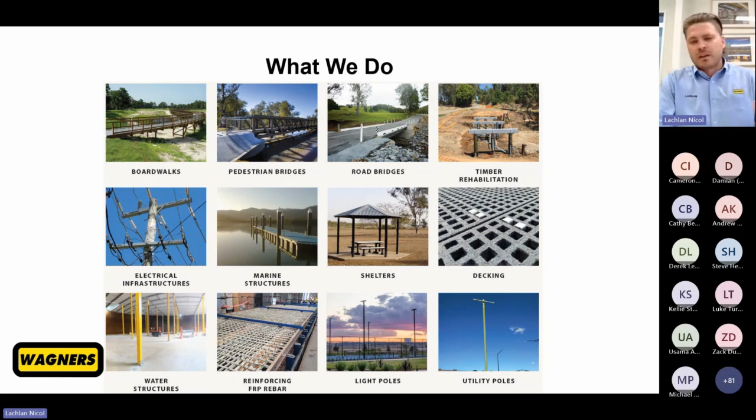What we do, which I'll only briefly touch on here, I'll talk about it later on. We essentially create structural pultrusion profiles out of fibre composite, and we supply them to a range of different product lines or projects, or essentially anywhere that structural members are required. That's where we usually service. So civil infrastructure, electrical infrastructure, industrial, those sort of things.

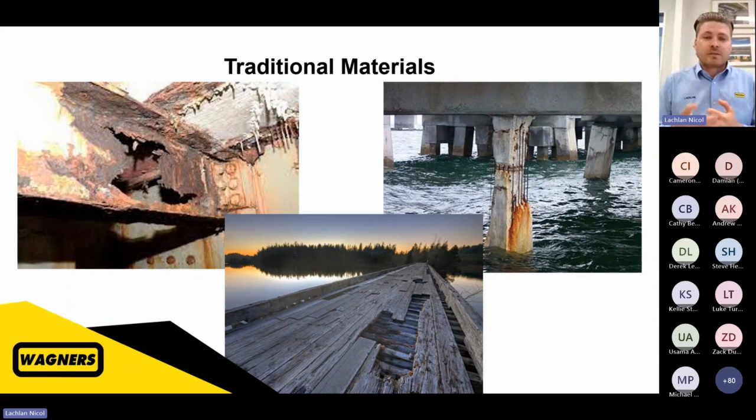The traditional materials, and these are obviously quite extreme examples, typically can suffer in corrosion-prone areas or very harsh environments, which is where fibre composite, at least in the civil marine infrastructure industry, has really taken off, to be able to combat those corrosion-prone areas. So very high salt environments, acid sulfate soils, what have you.

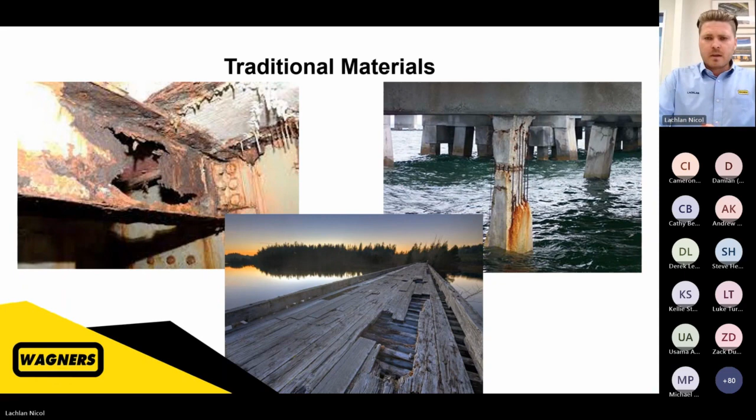The key benefits of FRP, fibre reinforced polymer, versus traditional materials such as steel, timber, concrete. I think a lot of people will understand the benefits, but the real key driver for us in this civil and marine infrastructure application is corrosion resistance, as I mentioned before. Doesn't rust, doesn't rot, doesn't corrode in all sorts of environments: acid sulfate soils, high salt environments, harsh alkali environments.

It's very lightweight, so about a quarter of the weight of steel for a traditional structure, say a 20-metre bridge. It's hard to compare on a metre per metre rate, a standard length weight ratio, because the design is slightly different in how you build up your structure. So if you consider it as a typical structure, about a quarter of the weight of steel structures.

The high strength to weight ratio: obviously lightweight, but we're actually quite a lot stronger than steel in the tensile direction. We're about 610 MPa. For those engineers out there who understand steel strengths, about 250 to 350 for your typical yield strengths of steel. So significantly stronger.

One of the challenges to work with in composites design is the lower modulus. We're about 40 GPa, so quite a lot lower than steel. So it's part of that different design: we would typically design around our service limits, so deflection limits for a bridge or a boardwalk, compared to the ultimate strength you would normally design for with steel.

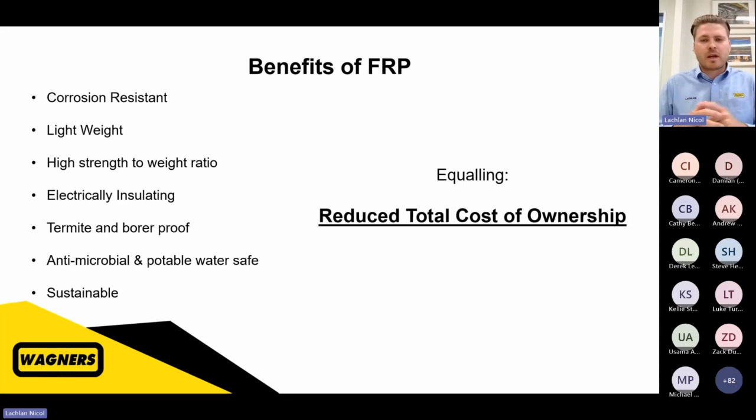You can get very specialised resins that have very unique properties, but come at a bit of a premium in cost. Whereas for civil infrastructure, where our key market is, vinyl ester is a really good corrosion-resistant, very hardy, very long-term resin. And essentially that holds all those rovings together. It doesn't provide a whole lot of strength necessarily. It just holds all the glass rovings in a nice, neat package, and that creates our structural material.

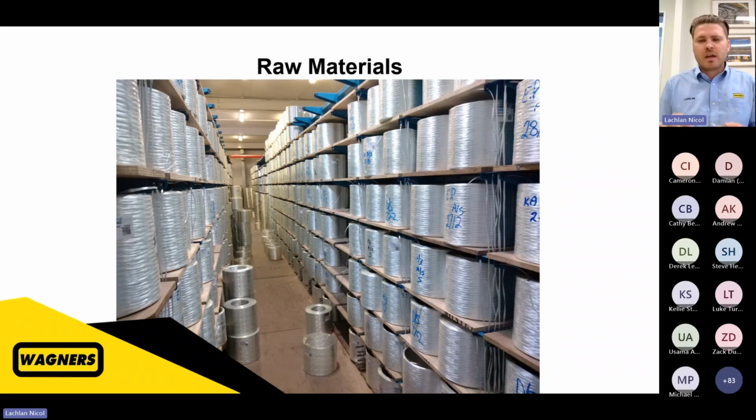So the pultrusion process, for those of you who don't know, a very basic overview. Glass rovings, like you saw in the racks there previously, are the key start to the whole process. Those get pulled through the rest of the line through a series of dies and guides. We apply a surface veil, so that encompasses the whole package. That's a polyester wrap over top of it, and that gives us a nice smooth surface. It creates a resin-rich layer, which helps with things like UV resistance and with that cosmetic finish.

Where all the magic happens is the injection and the heater dies. So this is where the resin is injected and flows through the full dry glass package. And then the heater dies cure the resin. So essentially it kicks off a chemical reaction based on the heat, and it cures it. So it goes from a liquid resin into a hard shape.

And then the reason for the name pultrusion, it's a pulling process. So unlike something like aluminium extrusion, where you would push a billet of material from the back, we pull all of our materials from the front through. So the pulling mechanisms are a hand-over-hand action. One's pulling all the material through, while the other one's returning back to home and waiting for its turn to take over, and then it takes over and just keeps feeding the whole line.

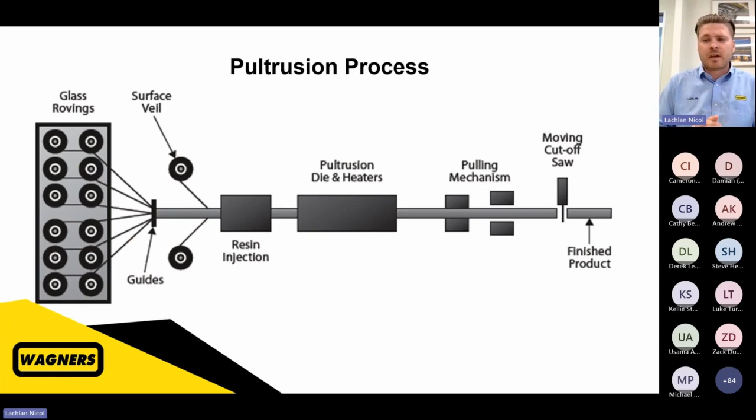Because it's an automated process, we have the ability to run 24 hours a day, 7 days a week without stopping at all. The material is all continuous, so continually injecting resin, continually tying in glass roving, so the process doesn't stop essentially. So we have an inline saw that cuts off all that material to the specific length that we require. This is a pultrusion machine, so very basic overview.

Some of our key points of difference is our glass to resin ratio. So we have a unique method of applying the glass around a centre mandrel called pull winding, as well as our injection die. So typically, normal pultrusion processes would require a bath and glass mats, and that also means a lot higher resin ratio, which, as I mentioned before, doesn't provide you any real strength. It just holds all the glass rovings, which do provide the strength in the material.

So our glass to resin ratio is about 77%, whereas typical pultrusion processes are about 50 to 55%. So as a result, we get significantly higher modulus, which is the key thing, like I said, the key driver in our design. So about 40 GPa elastic modulus in the tensile direction compared to about 15 to 20 GPa in traditional style pultrusion processes.

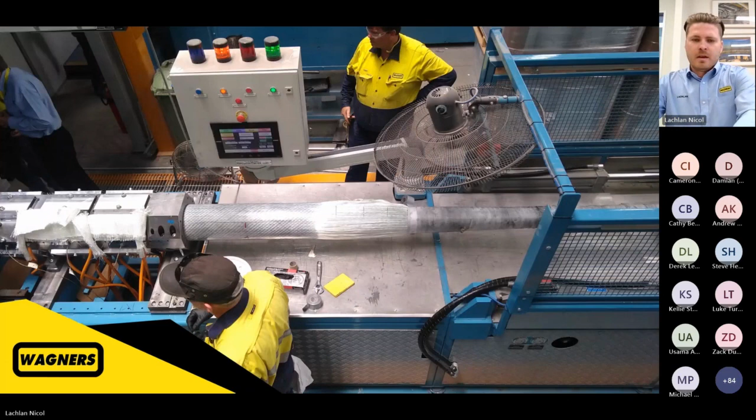This is a bit of a bird's eye shot just to show you the transition. So this is a new startup process. When we change a die, we need to pull through all of the glass. So you can see that little transition from glass package dry, and then once we started injecting the resin, that then starts curing it, and that creates this nice hard shape, which then goes through the pullers, and that's just a continuous process, 24 hours a day, 7 days a week, pultruding hard. Sorry.

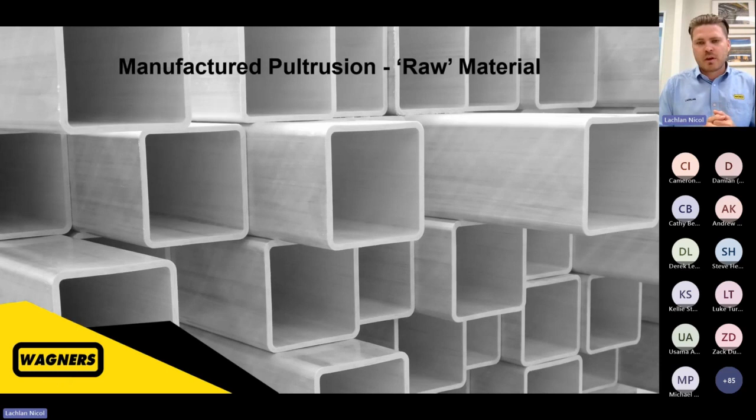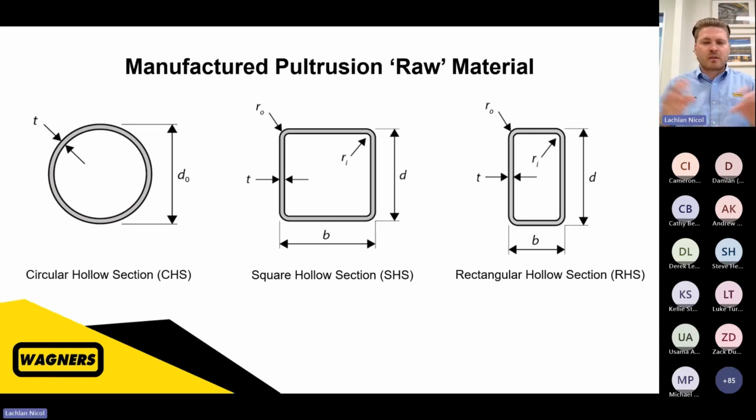Based on our unique method, one of our key differences is that pull winding process. We traditionally only make hollow profiles, part of that raw processing. So circular profiles, rectangular, square profiles. But our trick is we post-process and turn it into C-channels, I-beams, angles, what have you, to then do that full range of structural profile.

Part of the key point of difference as well for us is being ISO 9001 accredited. So we have a very stringent quality control program that includes raw materials, goods inwards, essentially, our glass, resin, inserts, adhesives, what have you, mechanical properties of our actual raw material, our raw pultrusion, physical properties, weight, dimensional checks, what have you, and then also our post-process, so our inserted material, our bonded material, our coating thickness. So checking every single process down the line to ensure what the asset owner gets at the end of the day is as designed, as expected, and will last that full 100-year design life.

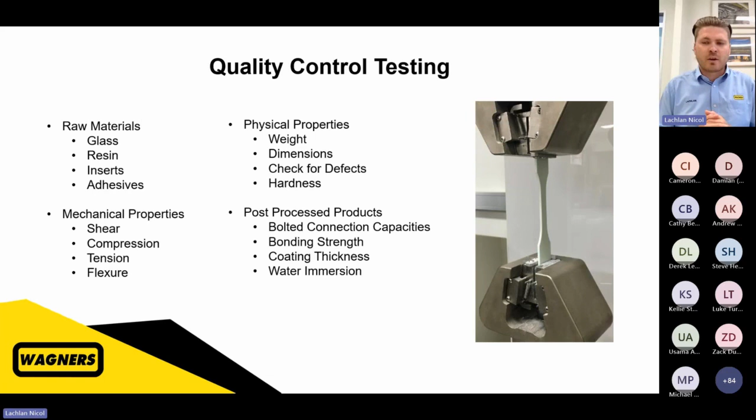Part of our other unique service offering is in-house design and testing. So we have a significant design group. So we do a lot of design in-house to support asset owners or contractors who might not typically be used to designing in composites. We do encourage clients to be able to design themselves, to sort of take out one of those key processes and give the authority back to themselves to design how they would like to design. However, we do have that service to give them assistance along the way, or design and certify in-house as needed.

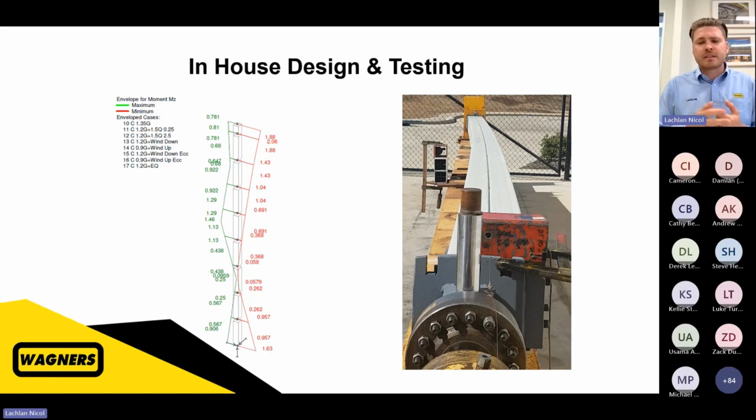So we're very proud to have these overheads that typically wouldn't be used in a direct project application. So the quality control process and our R&D, we're very proud to have these overheads on board because it helps us as a business to stay a competitive manufacturer in Australia. It ensures quality and ensures growth and development for a young and growing industry, which is the composites in the structural application.

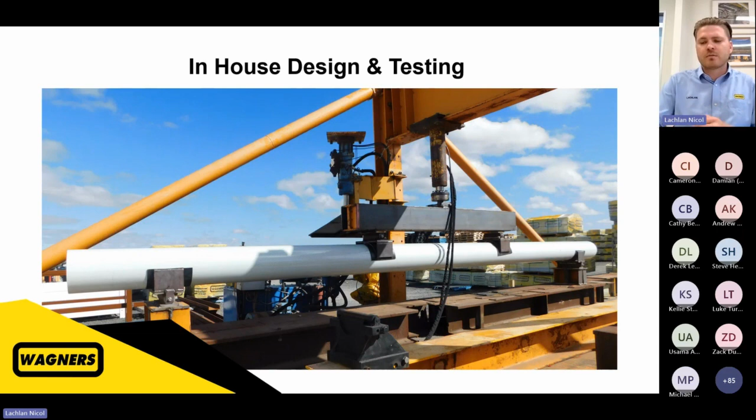As I mentioned, our raw material gets utilised in a whole lot of applications, but to be able to do that would be post-processing. So in-house here in the factory, we bond it. So we get two square profiles and we will sand it and apply an adhesive, and we'll bond it together to create a bigger shape and a bigger size. We coat everything, so that helps with the UV resistance. So that's another key point of difference that Wagners offers in composites, is to have a UV coating for every single product line that we ship out. That helps to give that 100-year design life.

We can also encourage contractors to be able to do that themselves. We have installation guides. We have supervisors who are available to go on site and help the contractors the first time, just to answer any questions that they might have with the new and unfamiliar material, which at the end of the day is not too complicated or not too dissimilar to traditional materials, but just gives that level of confidence to help support the contractors and the installation crew.

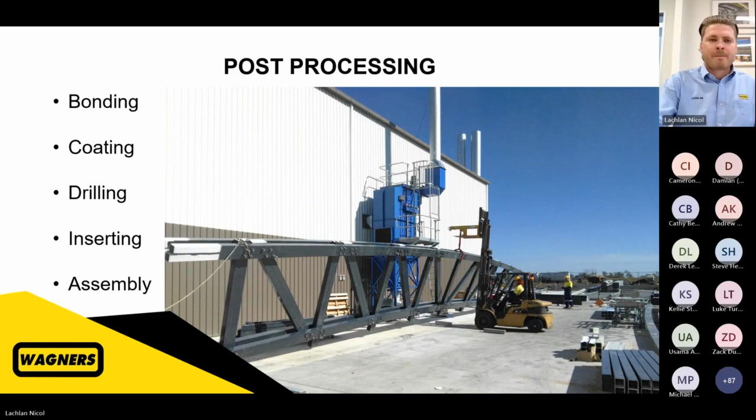So some of the product lines that we do, as I mentioned, one of our key areas is electrical infrastructure, so cross arms. For those who don't know, on the top of power poles, you'll see electrical cross arms holding up the power lines. That was our key business for the last 20 years, our bread and butter, the rinse and repeat. So this is to utility networks, Energy Queensland, so Ergon and Energex in Queensland here, and people like Essential Energy in New South Wales. So essentially holding up the power lines is the key thing.

And more recently, on the right-hand side, we've done the cross arms on top of the traditional timber power poles and steel power poles, but now we're doing our own power poles out of the same material, the composite fibre material, just a bigger and beefier profile to service up to 15-metre utility poles.

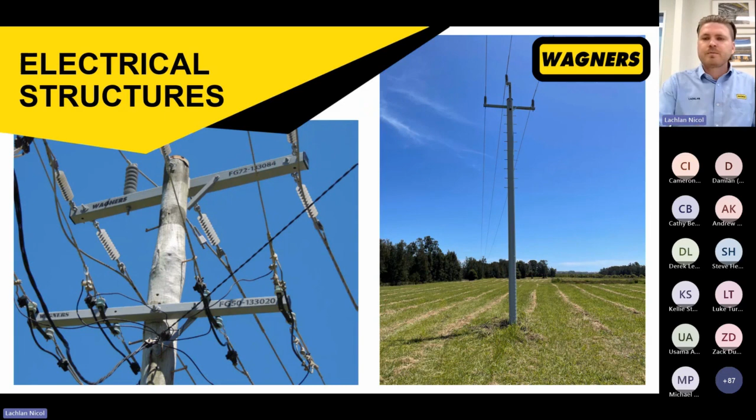More on the electrical infrastructure, so light poles, nice parks and gardens and roadway light poles, very aesthetically pleasing, very customisable, which is the key thing. So again, very much hit our sweet spot in corrosion-prone areas. So along marine strips on waterfronts where corrosion really hits the steel hard, or direct burial.

So traditional steel light poles will be anchor-based, so they'll be above ground, whereas the composite ones, based on the ability to resist corrosion through high water tables and saline environments, can be direct buried. So it saves a lot on installation cost and time, and also helps reduce that small narrow corridor between footpath and road, which is getting smaller and smaller, as the utility guys all understand.

Ducting, so electrical ducting, this is a recent project we've completed here for Cross River Rail. So again, that insulating material really helps for the safety and environment within the rail corridor.

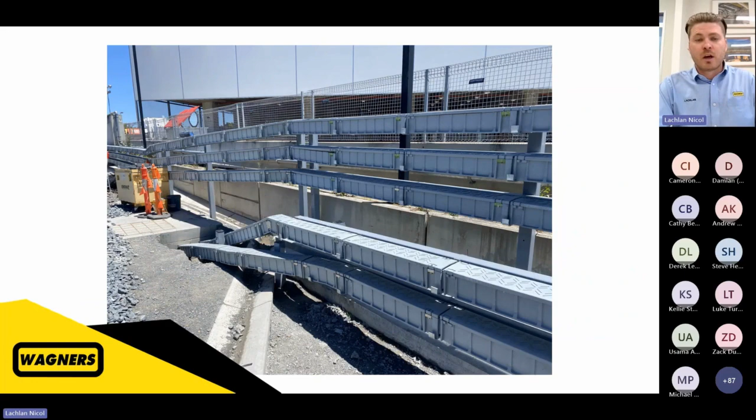Our automation line, so this helps post-process. This is a bit of a good news story for Australia and Queensland manufacturing. We got some support from the Queensland government to implement this automation line. One of our key drivers, and always a fear around automation in Australia, is the loss of jobs, and we saw that through the automotive industry.

But the way we promote it and the way we want to keep manufacturing in Australia is actually bring automation here and upskill our labour. So based on this automation line, we've doubled our capacity in our cross arms, and we've also actually employed more people and upskilled our labour to help support this business.

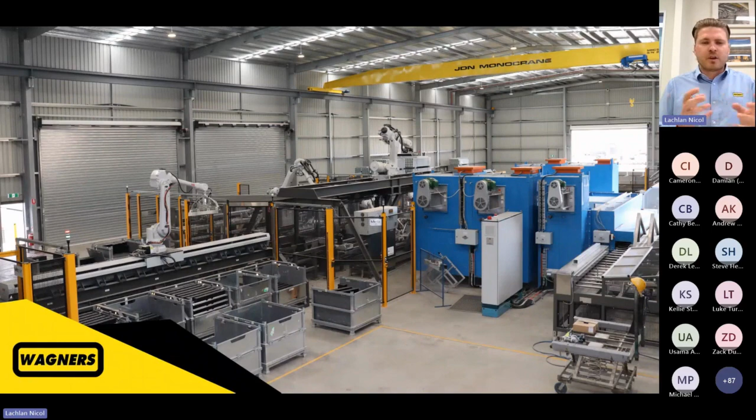So it's a good news story for us to bring in automation to drive efficiency, but also be able to increase jobs for Australia and Queensland workers. So very good news story, and that's how we believe that working with staff and employees and automation can go hand in hand and increase Australian manufacturing.

Civil structural applications, so key things for us is pedestrian bridges. Based on our increased strength and modulus, we are very good at undertaking truss bridges, very long spans, sort of up to 40 metres spans is a good sweet spot, 20 to 40 metres, using either a bolted truss bridge scenario using stainless steel connections, or similar to a traditional timber gang nail scenario, but instead of nails, we utilise rivets. So very similar traditional style bridges, but using composite instead.

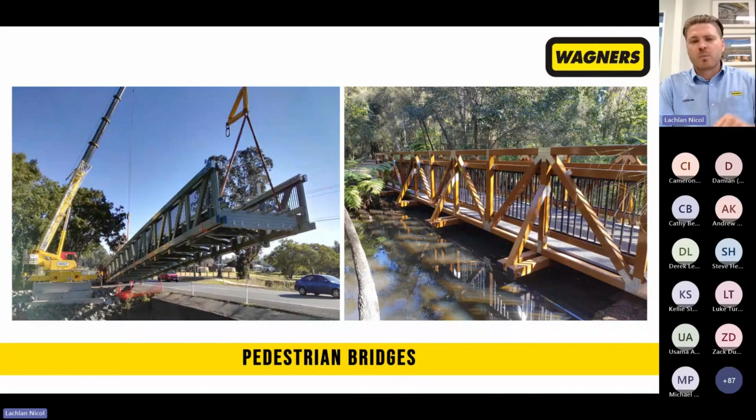Girder bridges, aesthetically pleasing, sort of Japanese style bridge on the left-hand side. Road bridges, so again, based on our higher strengths compared to normal traditional composites, we can get into road bridges, very high loads. This is an example from a 2004 bridge and a recheck in its first winter on the right-hand side from Buffalo in New York, upstate New York in the US.

So this had a key issue where the traditional concrete bridge was spalling out based on de-icing the roads using salt. So the composite scenario was very good for this application, and nearly 20 years on, it's still performing just as good as day one.

Boardwalks, this is in Ocala, Florida. Very traditional sort of stick build, very timber-esque, I suppose. So we can make the material look very similar to traditional while also giving those extra benefits for the longevity. Boardwalks and more boardwalks. So this is in Abu Dhabi. So we like to pair up with materials to suit the aesthetics. So this is obviously a rope balustrade and timber decking, what the clients want.

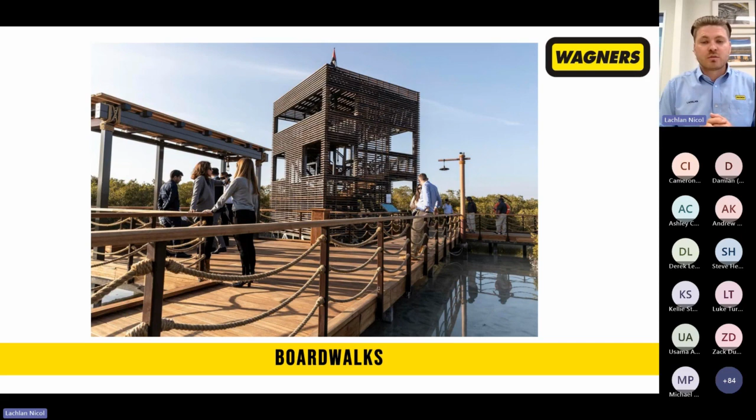So we're suiting what the aesthetics requirements are, what the clients would prefer to see and visually use, while also having the substructure long term. So the corrosion prone areas in the piles or the bearers or the boardwalk substructure, all composite, but the aesthetics looks like a traditional timber and rope balustrade boardwalk. Typical clip-on bridge on the side at Wollongong, Grand Pacific Walk.

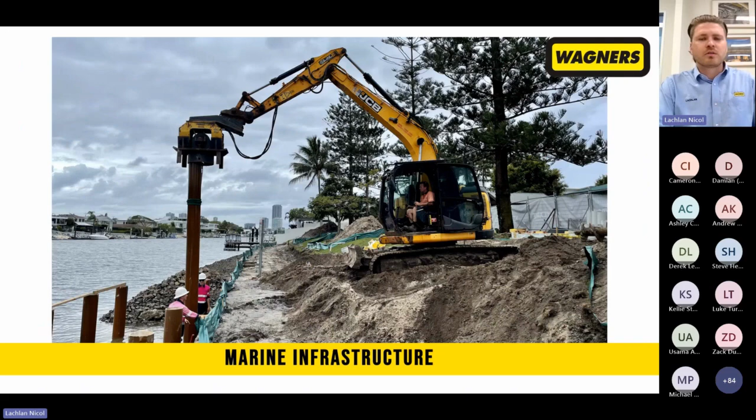Marine structures, again, the very corrosion-resistant nature of materials works very well for jetties, pontoons, what have you. Marine piles, lightweight, makes it very easy to install. This is on the Pinkenba wharf in the Brisbane River. So this is our clinker cement mill in Brisbane, using a composite substructure and an earth-friendly concrete topping slab.

Water industry. So this is potable water. So as I mentioned before, antimicrobial and potable water safe. And then more in the industrial aspect of roof purlins. So again, that corrosion-prone area where something like iron ore would very much rust out traditional steel purlins. So the composite is very good in application and pairing up with composite roof sheeting.

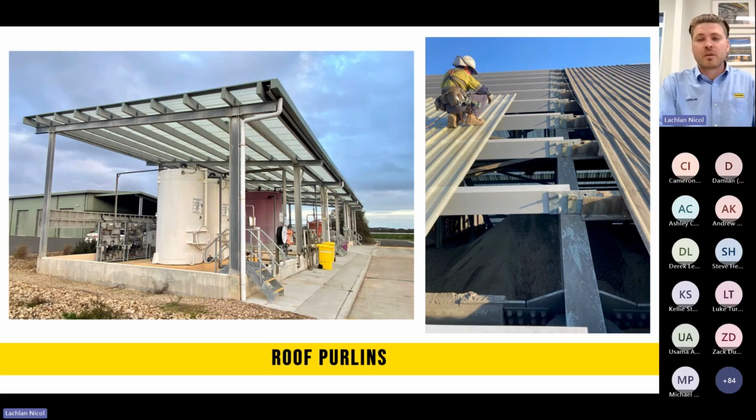And then to help asset owners and designers, we have a design guide. So part of the questions we usually get is how do we design in composites? There's no Australian standard yet. So we provide a design code, a design standard that is reflective of international American standards and also in line with utilising Australian and New Zealand load applications.

So you take AS 1170 for input loads or AS 5100 and you design it just using a few different factors to suit composites, but generally a similar process to how you design other materials. You just might focus on service load based on lower modulus versus strength where we've got a higher strength.

So that's available online and we are available to do some deep dive webinars with the designers or asset owners who would like to get into more details around designing. So those are available in this similar series as well. So please reach out if you've got any questions about designing in composites, and we're happy to help provide our structural and our certified engineers to help assist you with that.

The very brief overview for now. Like I said, there are more webinars coming for us to dive in deeper, but very brief overview for you guys, and appreciate the time to listen to the quick run through of what we do in Wagners CFT and how we produce a bespoke and different composite material for your structural application.

So Wagners Holdings is an Australian stock exchange listed company. It was established in Australia by the Wagners family in 1989. The business now boasts more than 1,000 employees in 7 countries, with manufacturing facilities in Australia, the US and UK, and supplies construction materials and services globally.

There are 3 main business units, which includes the Wagners Construction Materials and Service Division, which includes cement, fly ash, aggregates, precast concrete, reinforcing steel and bulk haulage services. We've also got Wagners Composite Fibre Technologies, which we've been discussing today, and Wagners Earth Friendly Concrete. Wagners Holdings is still very much a family business, with Joe, John, Neil and Denis Wagner actively involved in day-to-day operations.

So we're going to jump over to the question and answer section. I'm going to hand back to you, Lockie. The first question from Peter D: what cleaning chemicals are likely to affect the resin? Good question, Peter. So key thing for composites using that vinyl ester resin is there's not many chemicals that will affect it at all, and they have to be very, very high dosages. So any general cleaning materials or acids or what have you won't affect our material at all. So very safe in that aspect from a maintenance perspective.